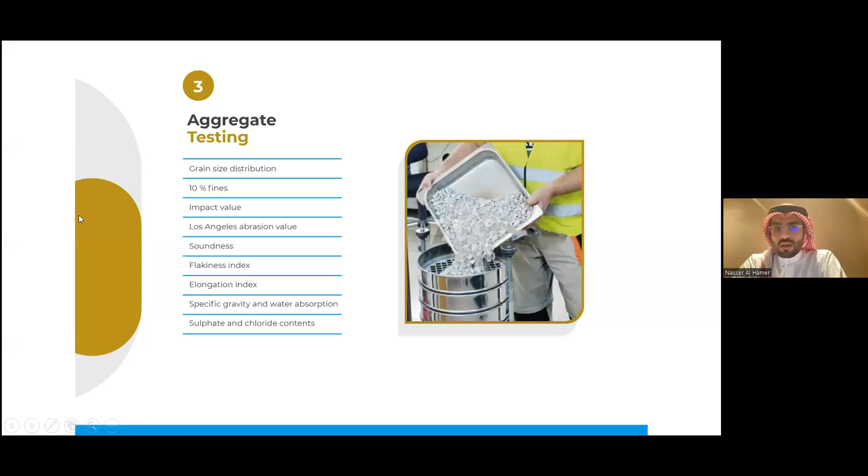Alhamdulillah, we are well equipped with using the most recent, accurate, approved testing methods available. We take pride in being an ISO 17025 accredited testing and calibration laboratory, which is registered and licensed under the CRP here in Bahrain. As part of a shared vision in 2019, alhamdulillah, International Laboratory Services and Al Hoty Stanger from Saudi have collaborated and JV'd to bring the best quality of testing, calibration, and consultancy services in the industry, which has not only elevated our capabilities but brought us up to become one of the leading companies in our fields within the market.

This is it to introduce our company, and now we will be moving on to the main subject of building material analysis, and I will be handing it over to my colleague, Mr. Murali Krishna, our lab in charge and technical manager.

Thank you, Mr. Nasser. Good evening, all. As our CEO, Mr. Nasser, has explained, I am Murali Krishna, the technical manager and laboratory in charge. As briefed by Mr. Nasser, we are a third-party testing laboratory, and we offer various services: construction material testing, geotechnical, and chemical testing, metallurgy, environmental testing which considers measurement of gases and other environmental conditions, non-destructive testing of steel and concrete, and structural investigations and failure analysis.

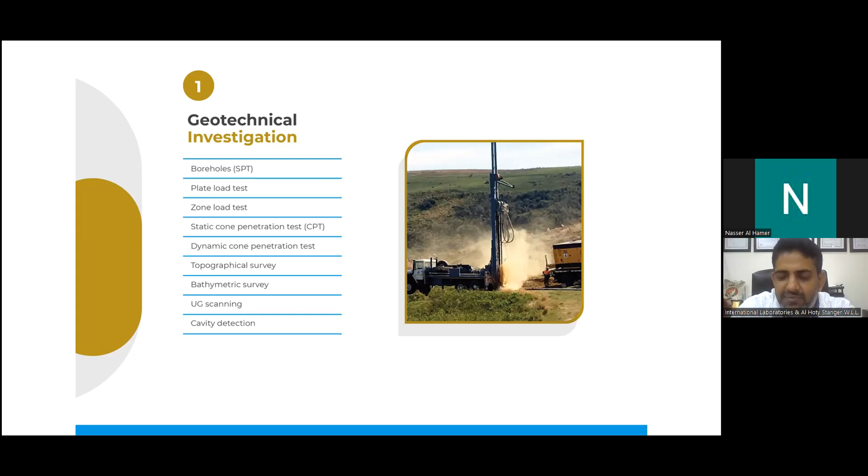First of all, the initial stage for any project would be the geotechnical investigation. Now it should be very familiar to most people in Bahrain with the new rule coming up that when applying for a building permit, we'll have to submit the soil investigation. So what do we do in soil investigation? We test the soil, we do the boreholes, we test the strength of the soil, and based on the strength, we recommend the bearing capacity of the soil, and whether any replacement filling is required or any soil improvement is required, depending on the type of structure.

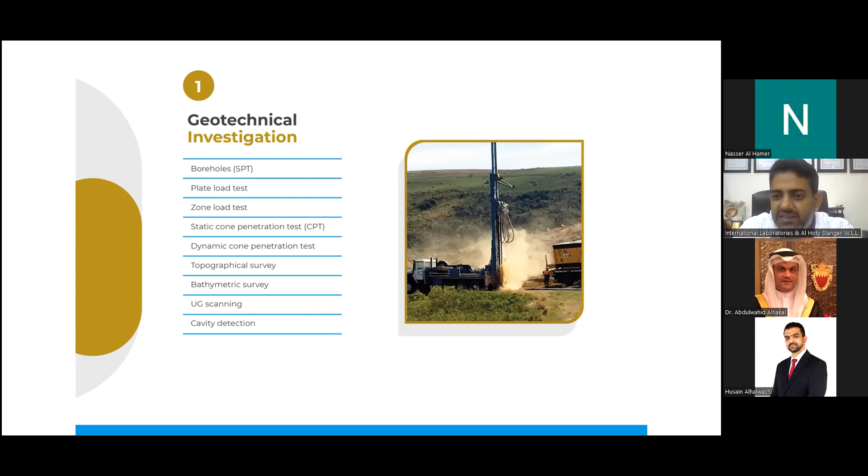Apart from boreholes, the other things categorized under geotechnical investigation would be plate load tests, zone load tests, cone penetration testing, and dynamic cone penetration testing. Apart from that, there are other geophysical methods like UG scanning, which is very much required for identifying underground services. In a few places where rock is present, there may be cavities, and for that, cavity detection using a combination of geophysical methods is used. Apart from that, for cutting and filling levels, a topographical survey will take care of that.

This is the foundation part. When the soil is tested - I mean, when filling or compaction is required - we fill the soils to raise the levels to a particular level. We test the soil for various parameters, like MDD, and the particle size distribution, which gives us the various sizes of particles. We have regulations here as per the Ministry of Housing or Ministry of Works, which has various classes and grades of material suited for particular specific purposes, and these are all the various tests that can be done to check the quality of the materials.

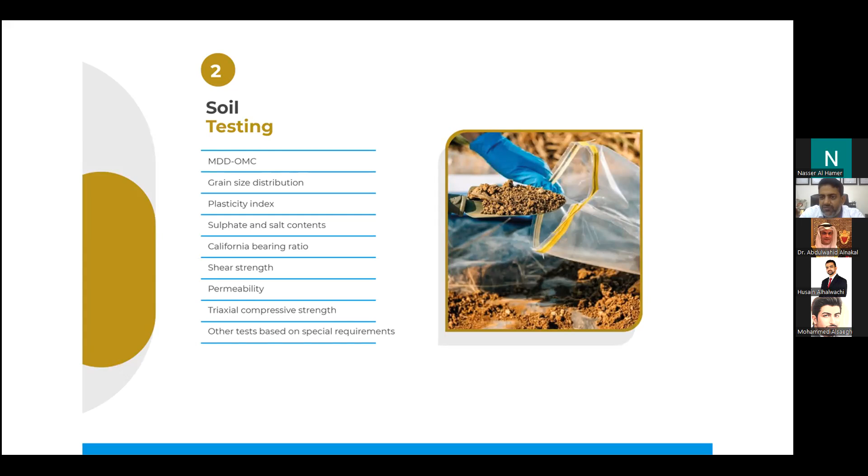Next, aggregate is also tested for many of the parameters, which is used in concrete, in pipe bedding, and various other factors. The various tests on aggregate include grain size distribution and 10% fines, Los Angeles abrasion value, then flakiness elongation index, which is very important

in the concrete design mix, then specific gravity, water absorption, and then of course the chemical contents, the sulfate, chloride, the pH value, acids, alkali silica reactivity, which is very harmful for the concrete.

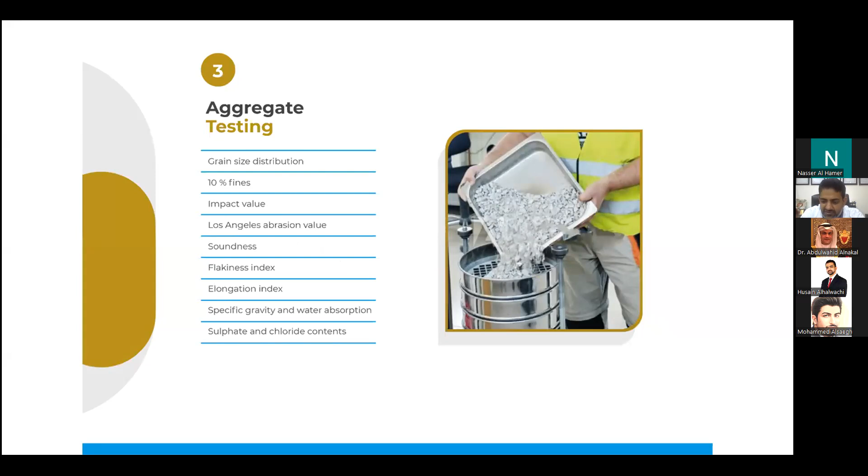Then coming to concrete as a part of quality control, as concrete is being placed in the structures, various members of the structures, we do sampling of the concrete, we measure the slump, and we cast cubes and test them for compressive strength.

Apart from that, there are other tests on concrete for long-term structures like embankments or retaining walls, where the concrete is supposed to have specific requirements in terms of durability. So various durability tests are also addressed and tested in our facility.

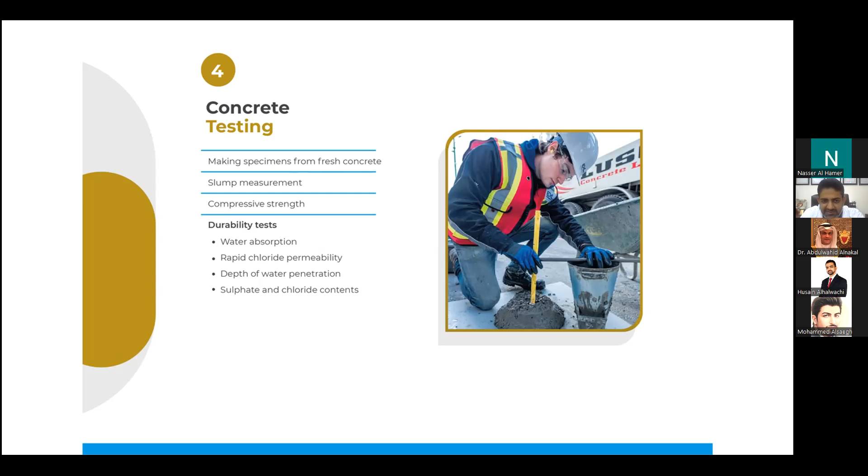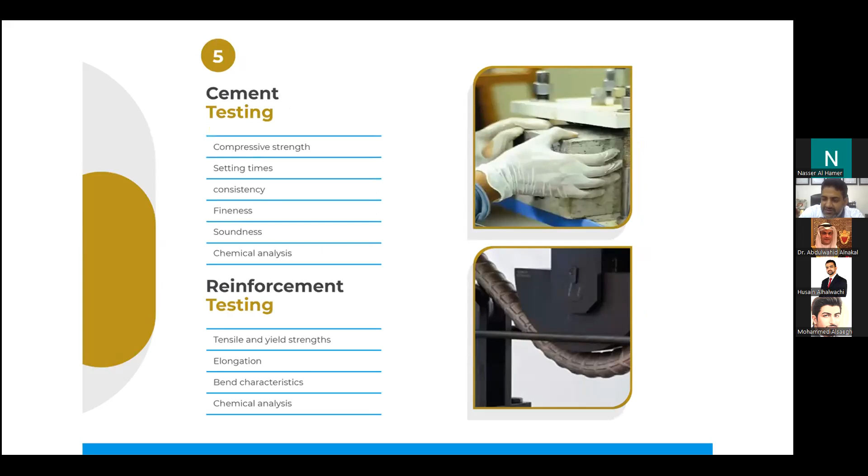Then the constituents of the concrete, which is cement, sand, and all, they are tested as well. Cement is tested for compressive strength, the setting times, and various other tests. Whereas the reinforcement that goes into the concrete, the steel, that is also tested for tensile, bend, and chemical analysis, various other characteristics.

In Bahrain, there have been so many reclamations. We reclaim from the sea, fill the land, and we are constructing. For that, there are armor stones, protection, and all the other things, riprap, and all that is being used.

For that, rocks require various testing. The size or the grading of the rocks, then the shape index, drop test, then the density, water absorption, the compressive strength of the rock, and various other tests are also being done.

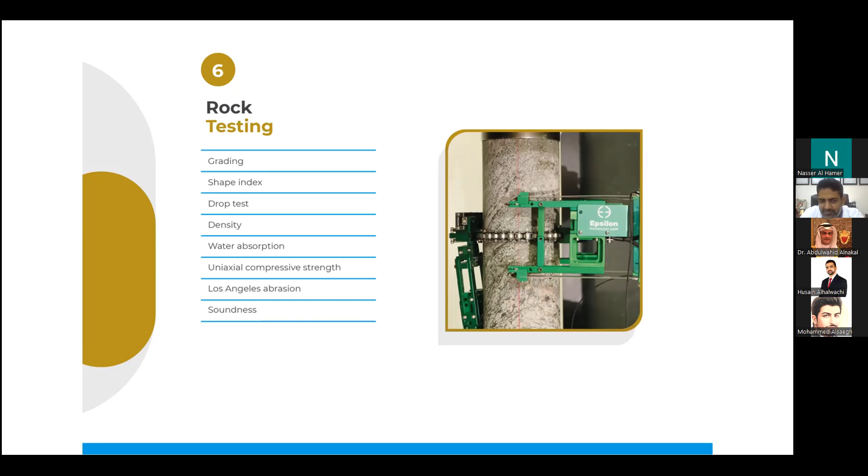Then the water that is used in construction purposes is tested for various parameters. Water can be used for different intentions, like for construction or as drinking water. Based on the requirement, the parameters are tested for the water.

Construction water has a few parameters, whereas drinking water has an extensive range of parameters, including a few microbiological tests as well.

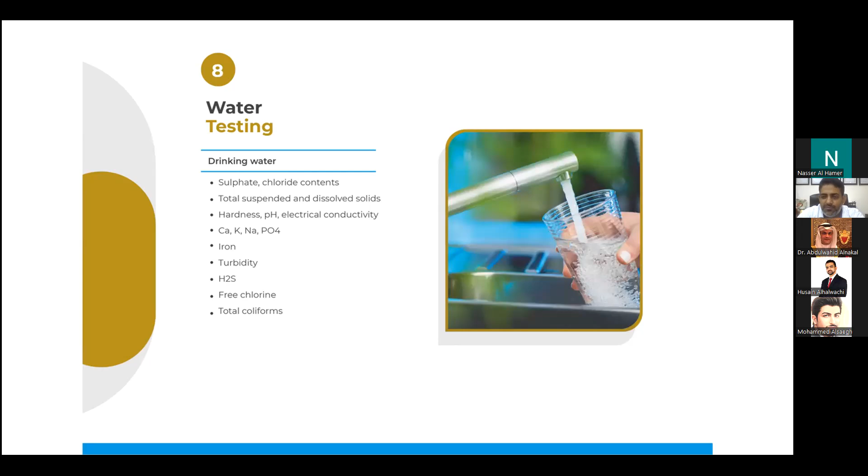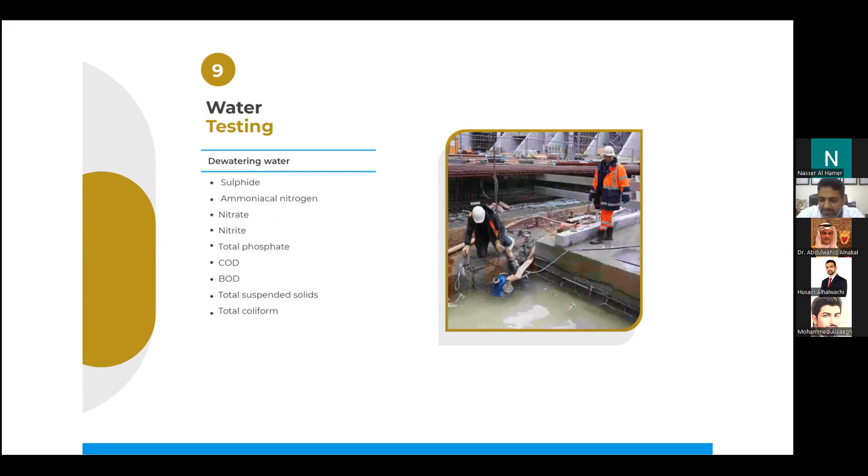And then there is wastewater testing and dewatering testing as well. These are a few of the parameters that are tested in the dewatering water. Wastewater is tested for all the heavy chemicals, heavy metals, arsenic, cadmium, mercury, etc.

Then further in construction, the masonry units like the blocks, hollow blocks, solid blocks, are all tested for compressive strength, density, water absorption. And then another important aspect tested here is the thermal conductivity, which gives us how much heat transfer the blocks will allow through them, which is of very prime importance in Bahrain.

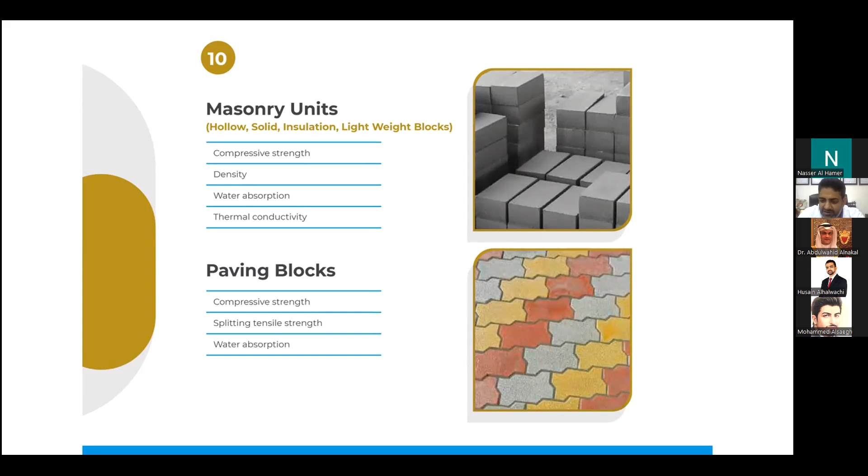Then further, the paving blocks are tested for a few parameters to ensure proper compliance with standards. And then all the parts for the road works, like kerbs, are tested as well. And then the wood that is used for doors, windows, and plywood, all these things are being tested.

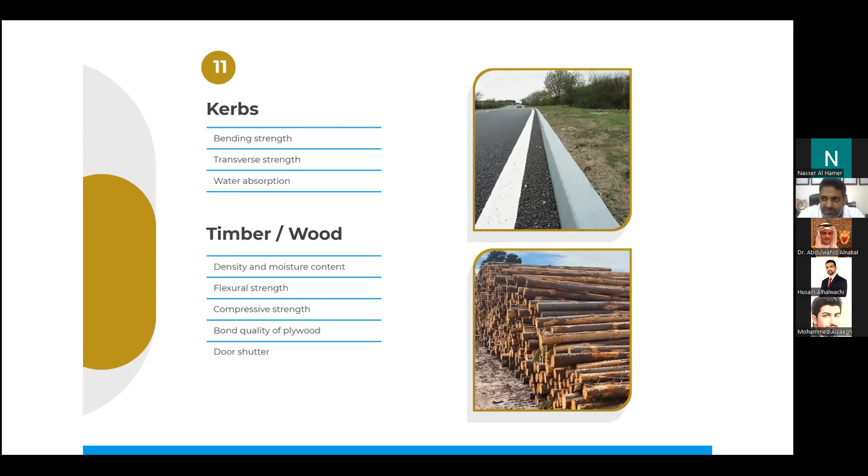Then for the roads, asphalt is tested for the bitumen content, for the grading. The strength is obtained from the Marshall stability and flow, density, then the rate of spray, all these things are also tested.

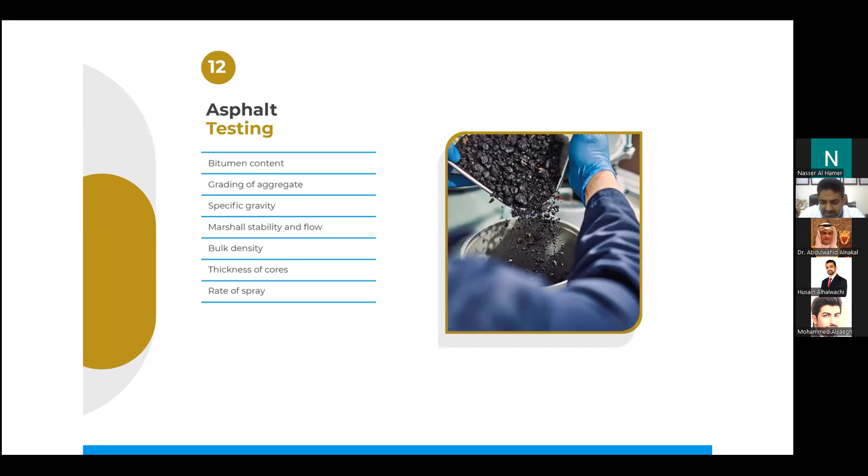Then further to that, the finishing part, tiles are also tested for various parameters. Nobody wants uneven tiles. To ensure that the tiles are flat, we test them for surface flatness. To ensure they don't break, we test them for modulus of rupture, which gives the strength parameter, and then the dimensions and all those things.

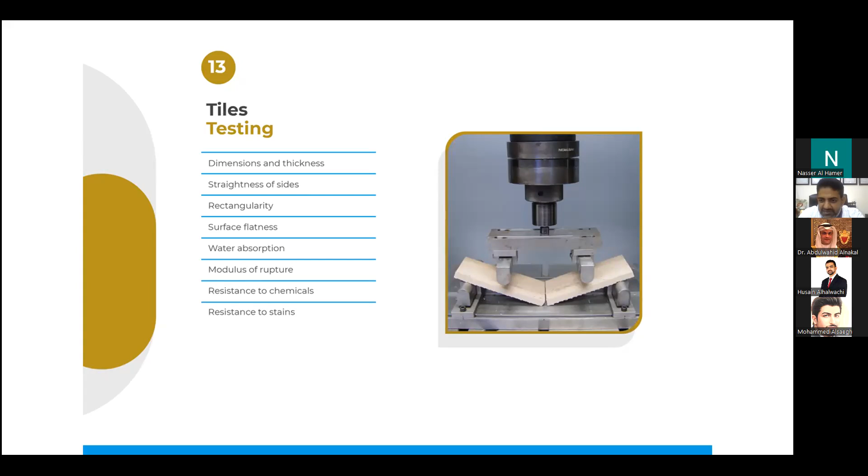And apart from that, the tiles where they are being used in kitchens and all, they are subject to cleaning and stains. We check them for the stains and abrasion and all those things as well.

Then paint is also tested for various parameters like the opacity, drying time, and once the painting is done, the coating thickness is also measured.

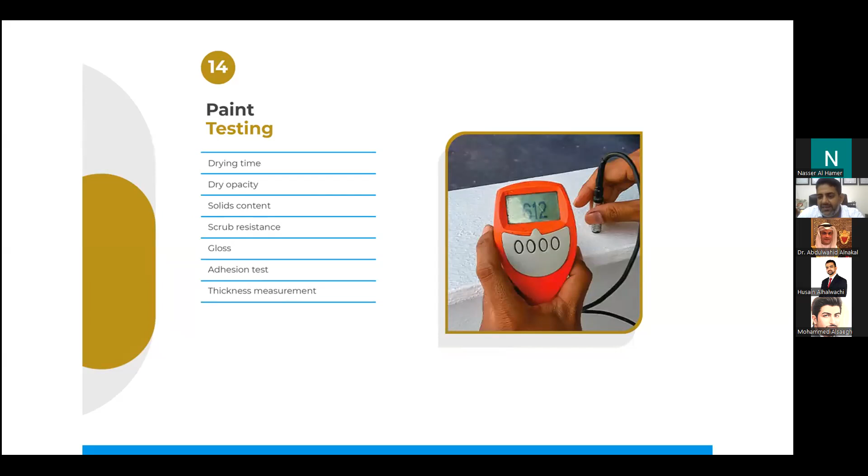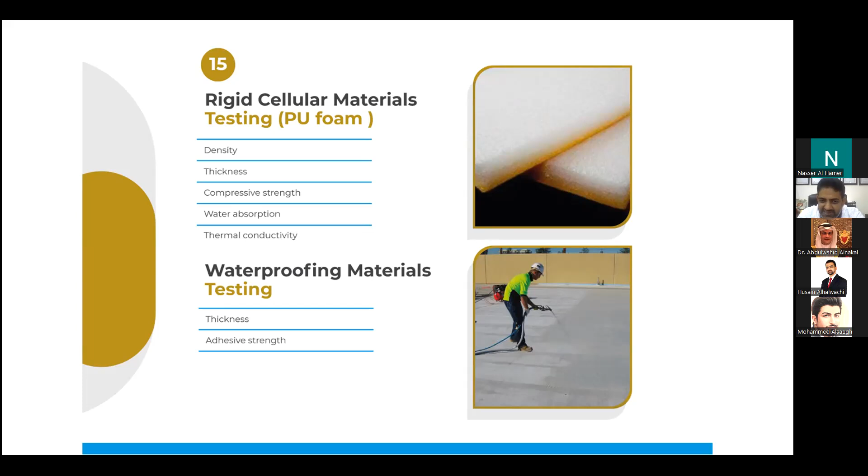The insulation part, the PU foam, polyurethane foam, is tested for compressive strength, water absorption, conductivity, and all those things. Another component of the waterproofing is the bituminous membranes laid on the roofs. Those are also tested for thickness, adhesive strength, tensile strength, tear strength, puncture strength, and all those methods.

In spite of taking all the necessary quality control measures and other things, there will be few instances where we need to do testing on constructed buildings, maybe to check the life expectancy, or if there are some mishaps during construction. So the existing structures need to be tested. Those are taken care of in the non-destructive testing of concrete.

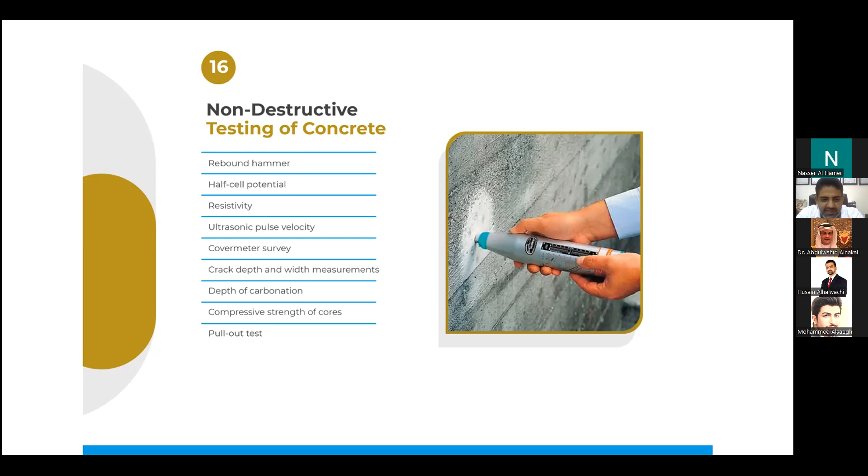Then they are tested for cores. The non-destructive testing of steel is also one major component. We test the sections for thickness. Then if any welding or other things are involved, we test them with DPT, dye penetrant testing, radiography, and other such methods. We have also recently started microbiological testing of water and food products as well.

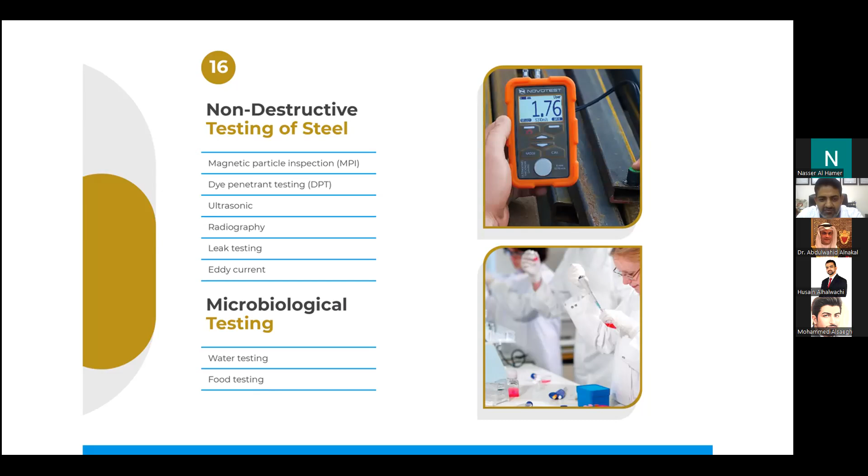So in short, that is the building materials analysis and the various facilities we offer in our laboratory. And I once again thank the Bahrain Society of Chemists for giving us this wonderful opportunity to portray us this way. Thank you, sir.